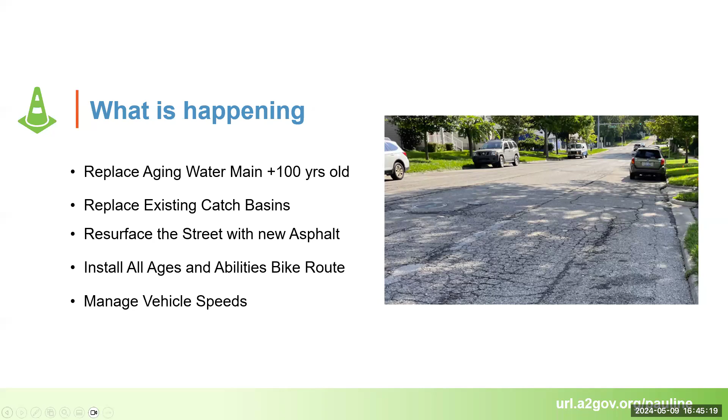Now I'd like to hand over to Cyrus, our project transportation engineer, to give us a little bit more background on the different aspects of the deliverables.

Thanks, Nicholas. This is Cyrus Nahidi speaking, and as Nicholas mentioned, there's a few aspects related to city policy and the transportation plan. Those are the policy basis for many infrastructure changes the city is undertaking.

So the term Vision Zero refers to the goal of having no fatal or serious injury crashes on Ann Arbor streets by 2025. Two approaches for accomplishing this are to reduce the speeds of vehicles operating on Ann Arbor streets and to better separate uses of the street, such as pedestrian, bicycle, and transit use, separating those uses from each other.

Meanwhile, the carbon neutrality goal is that by 2030, our transportation system contributes zero emissions towards climate change. The approaches for accomplishing this include fostering more use of green transportation modes to result in fewer vehicle trips, and encouraging more use of electrical vehicles for those vehicle trips that still occur.

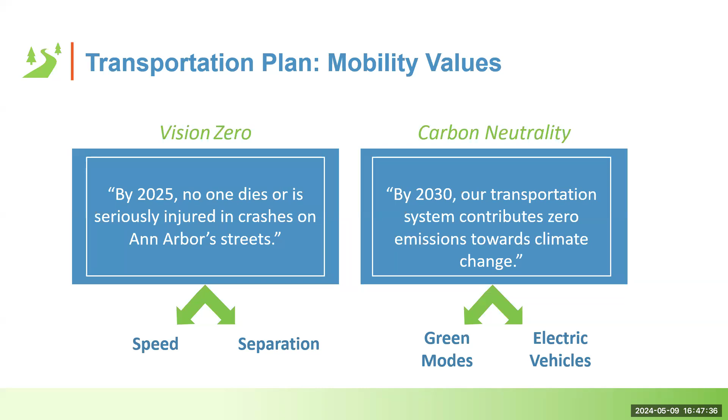So Nicholas mentioned a bit ago about an all ages and abilities bike route, and it's a term that's probably worth explaining because it may not be intuitive. That term comes from our transportation plan, and what it really means is that there's an emphasis on protecting the most vulnerable users of the street at all ages in their lifespan.

And the goal is making the route safe for all users, whether you're walking, biking, rolling, taking transit, or driving. Context helps to determine the design of the street, so it depends on how fast vehicle traffic travels, how much traffic travels on the street, type and the uses of the street, as well as community preference and the project budget.

So it's worth noting that one of the project goals will be to bring vehicle operating speeds down. Currently, we have a speed limit of 30 miles per hour, and the design speed on a road like that is 35 miles per hour, as traditional traffic engineering would dictate. Our goal would be to bring the typical operating speed down below 30 miles per hour, closer to 25 miles per hour.

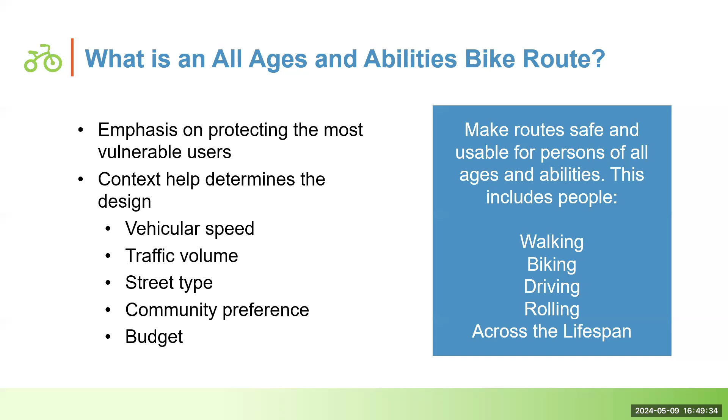I'll hand it back to Nicholas to talk a little bit about the project overview and schedule.

Thank you. Yes, so clearly we understand that there is the football program that U of M prepares, so we are keeping that in mind as we prepare our construction timeline. Right now, we're in the public engagement aspect. That'll carry on through spring of 2024, and we'll have our final design in the fall of 2024.

And then we're going to kick things off early in March for an early start of construction season, and we're planning on having everything completed by the end of July, first week in August, so that we're well in advance of the big rush for the football season.

The limits of the project are between 7th and Main. We'll be replacing the water main, which is about 2,500 feet. We will need to get into the 7th intersection for some temporary closure, but that will be limited to a shorter duration of the overall project, so we'll try to minimize the impact on that intersection. Right now, we don't anticipate any interaction in the Main Street intersection.

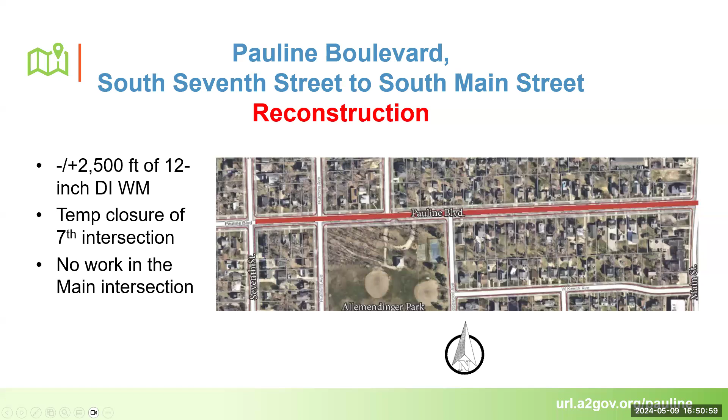Now Cyrus is going to start to go into the configuration of our pavement surface. Thanks, Nicholas. We wanted to talk a little bit about potential ways to change the layout of the road to accomplish the policy goals we just talked about, the transportation plan and the A2ZERO carbon neutrality plan. Specifically, trying to make this an all ages and abilities route to make it more comfortable for people biking, more accessible for pedestrians, while still accommodating transit use and making it safer for drivers.

One thing you may notice is that this may be familiar for anyone who's been further west on Pauline Boulevard. The project that Nicholas referred to earlier, between 7th and Stadium, has this configuration where we have parking on the north side of Pauline, and buffered bike lanes on each side of the street.

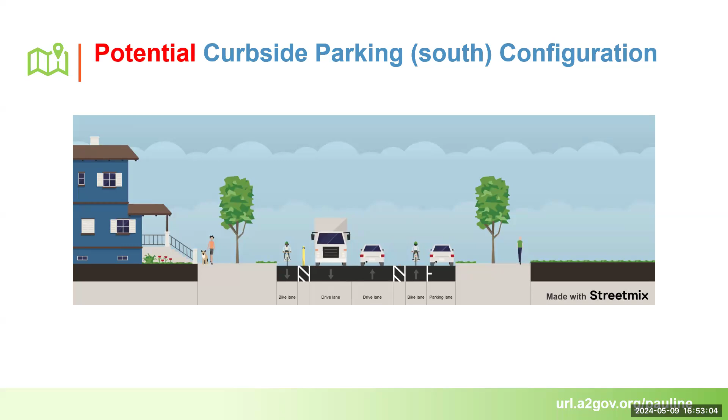A similar configuration would essentially flip that, where we have curbside parking on the south. We'll just highlight the difference between these two configurations. Otherwise, it's the same as what we just discussed: buffered bike lanes in both directions. In this case, the curbside parking would move to the south curb, so that'd be more accessible to the park. Meanwhile, parking on the north side would be removed for the entire project area between 7th and Main.

This is again similar to that project area between 7th and Stadium. The difference here being that on that project area, parking is allowed on the north curb. Here, in this configuration, it would be allowed on the south curb.

That being said, when the Pauline 7th to Stadium project was completed, since then there's been some evolution in terms of types of design we can consider. So there are a few other design options that we can consider that would provide a higher comfort bike facility for both directions of travel, because in this case, we have bicyclists biking next to the parked cars, a little bit more exposed to traffic in both of these configurations.

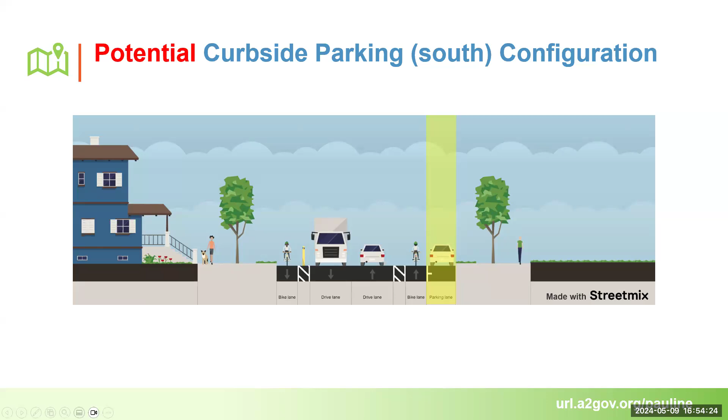So the next configuration is a little bit closer to the first north parking configuration. We still have parking allowed on the north side, as highlighted here. It's the same uses of the street: we have a buffered bike lane in each direction, parking, and two directions of vehicle travel. But in this case, because of changing where the parking and the bike lane are laid out relative to each other, we are able to better protect both directions of bike travel.

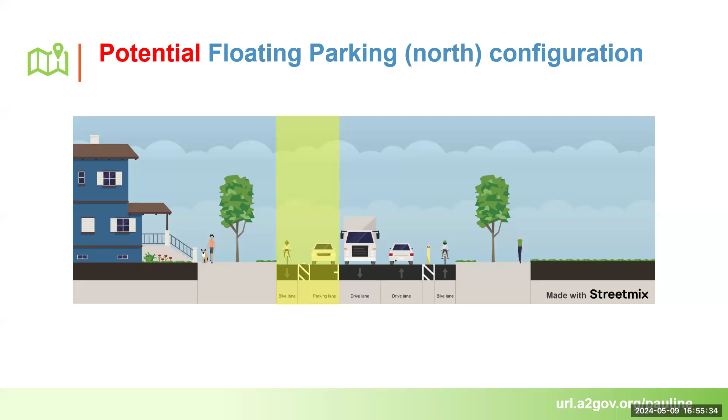This floating parking arrangement acts as protection for the bike lane along the north curb, creating a more protected, comprehensive all ages and abilities bike route. It's important to note, though, that coordination with Public Works would be required to ensure that solid waste service for trash, recycling, and compost would continue without issues. We would have to work with Public Works to determine how to best allow them to do that curbside service.

So again, to reiterate, in terms of accomplishing the transportation plan goals, these two floating parking configurations are the design options that align most closely with the goals of the transportation plan and A2ZERO, as they both provide an all ages and abilities bike route in both directions of travel.

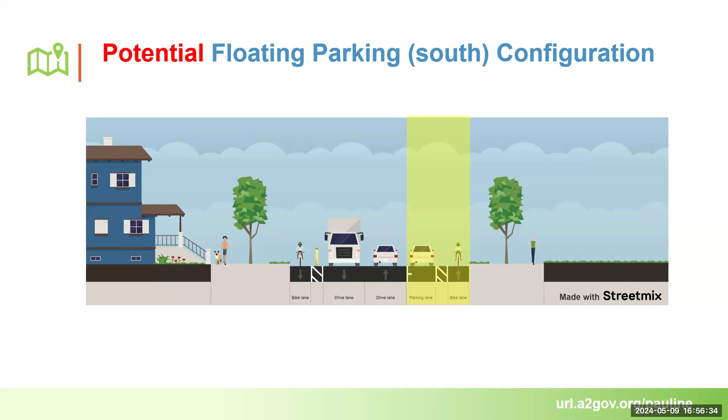One last cross-section configuration to share is regarding the crosswalks. The last several slides showed what the cross sections for Pauline Boulevard could look like in those areas where parking exists. But at crosswalks where parking is illegal, the space that would otherwise be used for parking can be redistributed.

Those crosswalks can be created with what is known as a pedestrian bump out design. That design would extend the sidewalk and use what would otherwise be the parking lane. This improves the ability for drivers to see pedestrians by bringing them past the parked vehicles nearby. Pedestrians are then protected for a greater distance through that extended sidewalk, and ultimately have a shorter distance of street to cross.

So this accomplishes a little bit more of our transportation plan goals.

You might be familiar with the project on Pauline west of here—the redesign between 7th and Stadium—which has two crosswalks similar to this, one at Arbordale and one at Redeemer. Both have bumped out crosswalks, and it's important to note those would be wider than the crosswalk currently at 5th Street.